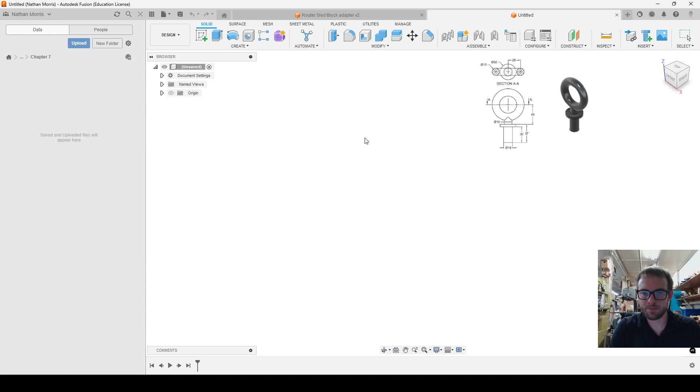To get started, we'll create a sketch on this bottom plane. Looking at the drawing again, we have this cross section. We have a circle that's 15 millimeters in diameter, and it is 25 millimeters from the center origin.

I'm going to create a line and make it a construction line, and that is going to be 25 millimeters long. Then a circle, I don't want it to be construction, and that needs to be 15 millimeters in diameter. The book recommends that we also make a construction line.

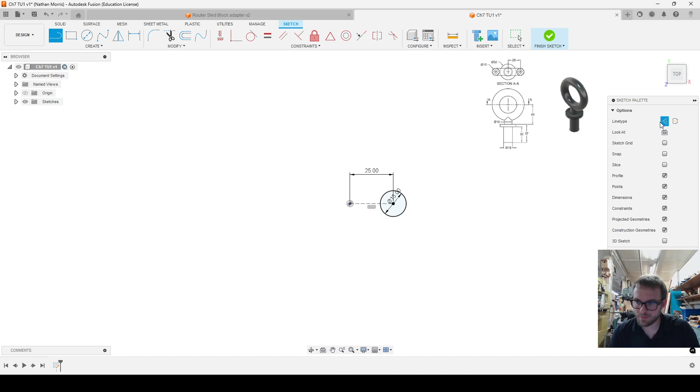This way too, just as a center line for this next step. So I'll hit finish sketch, and it brings me like this. I actually don't think I needed that center line, but I'll do it the way the book said.

So I hit the revolve tool up here, and it brought me into here. It already had the profile selected because that's the only shape that was valid that I've drawn so far. And so I could have selected the green axis here, but I'll select my

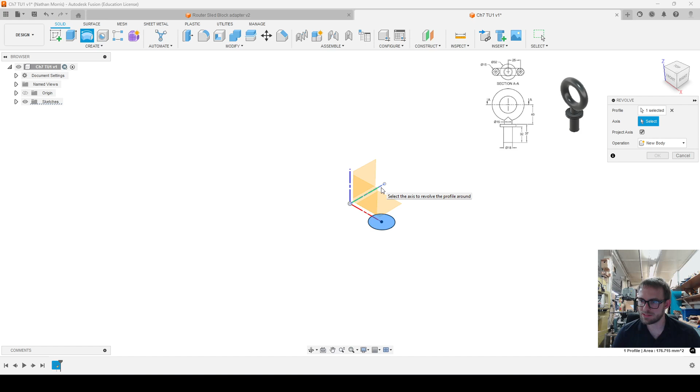construction line here, and then it automatically does this ring all the way around. So it's a partial revolution, but it does 360 degrees by default, so that works. I could also change it to full, same thing. So I'll hit OK, and now I need to create the next part.

So to do that, I need to create a construction plane, but I don't have something to construct off of. Oh, actually, when I do select that, I can see this.

But if I couldn't, I could always go over to the construction or the origin area here, and I could turn on these planes to make them visible. And so if it didn't show by default, I could select that.

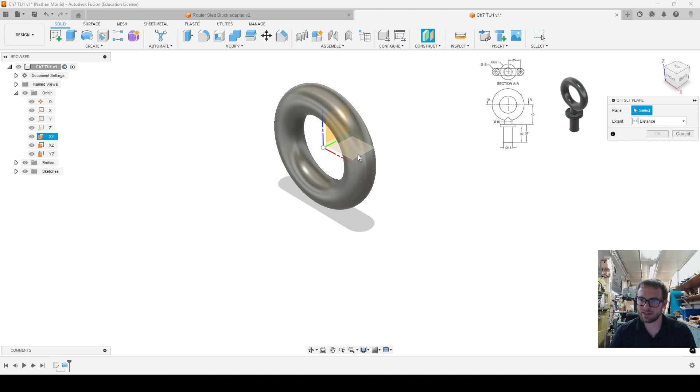So I'll select from this middle plane, which is my bottom plane, but it's in the middle of my ring. I'll select that, and I want to go down 40 millimeters, and that's specified.

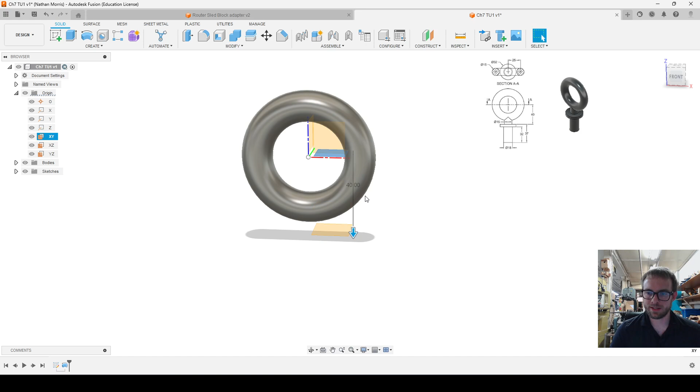That is the top of that circular flange thing. So I'll do -40, and I'll hit enter. Now I can turn off those construction, the origin planes rather.

So I'll create a sketch now, and I'm going to create it on this plane. We still have this origin to reference, so I can center things on that. Now I'm going to be creating that flange, or rather the little vertical part just above the flange.

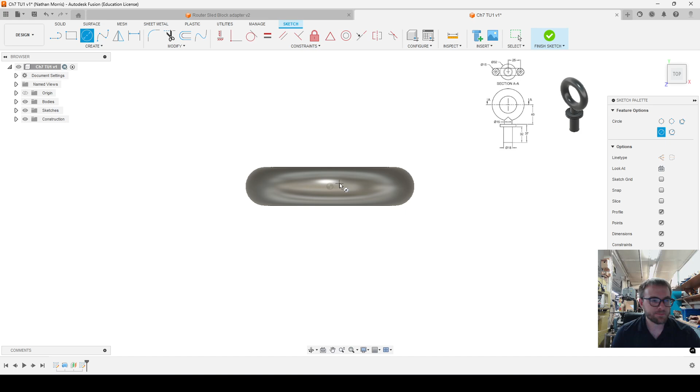So I'll create a circle, and that's hard to see from this view. 32 millimeters is the larger one. Oh, it says in the lower image that it's 15 millimeters in diameter. So same as the ring, it's 15 millimeters in diameter.

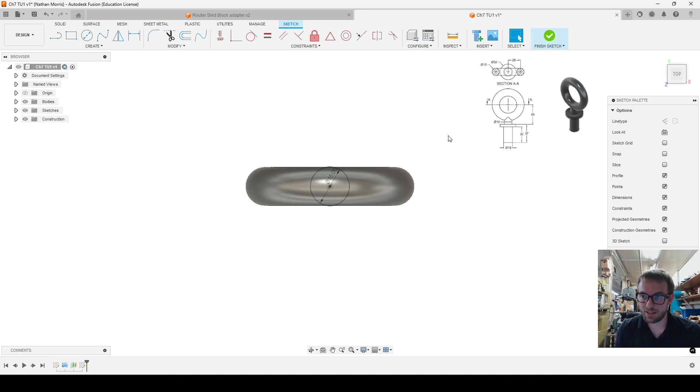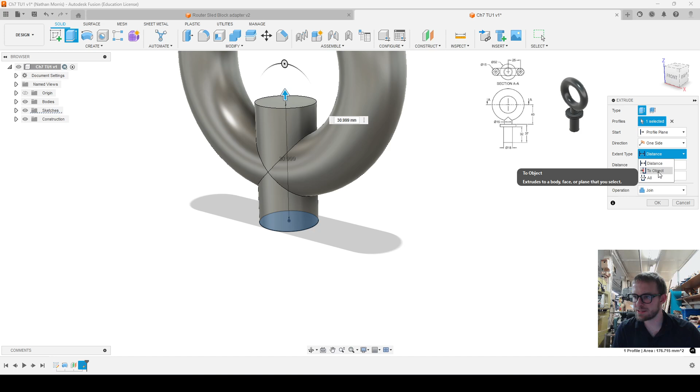I can hit enter, I can hit finish sketch, and then I can extrude this upward, and I can just drag it up into here. Now notice if I drag it up, it defaults the operation to cutting over here in this menu. I don't want it to do that, but I also want it to go a very specific amount. So what I'm going to do is change it to join, and rather than extent type distance, I'm going to say to object, and that object is going to be this ring.

So now it won't intersect with that, it'll just go all the way up until it hits in all of those areas. So that's what we want.

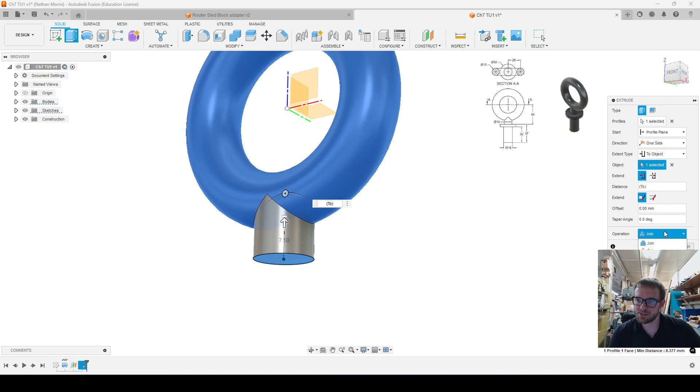So again, I changed my extent type to object. The object I selected was the ring, and then it is joining with that ring so that it's going to be one solid body. I'll hit OK, and now this is considered one body. It's all together.

So I'll go from there. Now I can create a sketch on the bottom of this plane and draw my washer flange thing, whatever you want to call it. This is 32 millimeters in diameter.

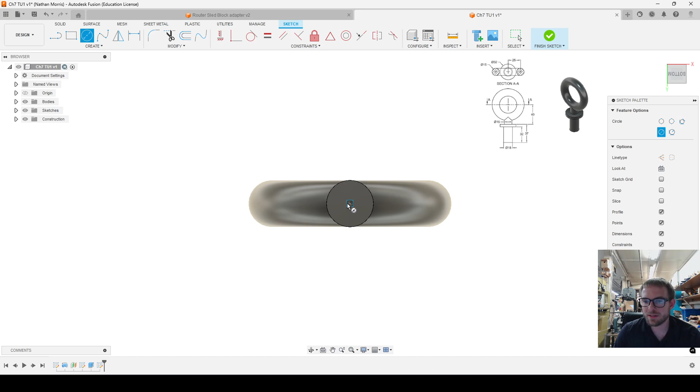So I can hit E to extrude that. We're going down, and it is 37 minus 32, so it is 5.

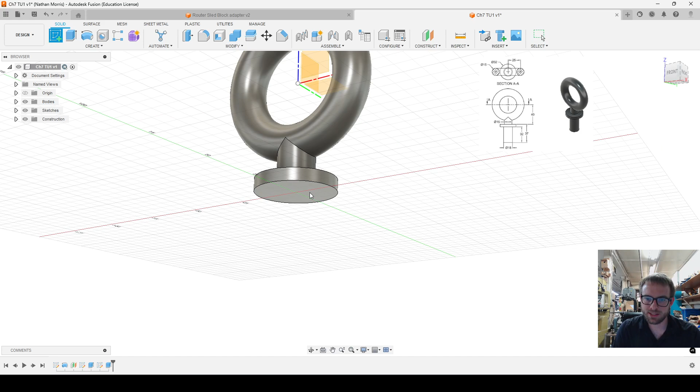And I can just keep going down too. I can create another sketch right here, create another drawing, and since I'm not given another diameter, or rather I am actually, at the bottom it says 18. So I can draw an 18 millimeter circle there, and then hit E to extrude, bring that down, and that is 32 millimeters.

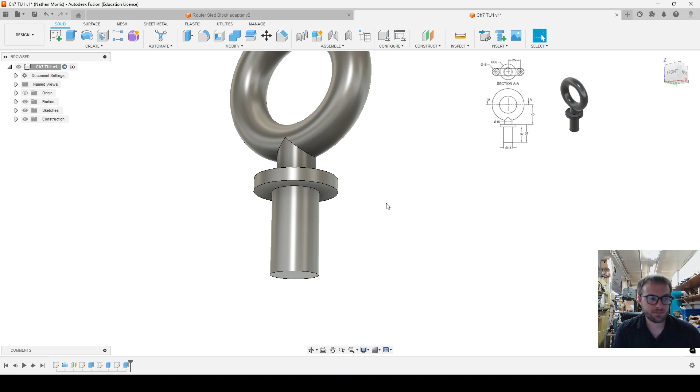So that should be my entire shape done.

So now the rest of the instructions were that I need to assign the stainless steel AISI 310 material and calculate its mass properties. So I'll do that.

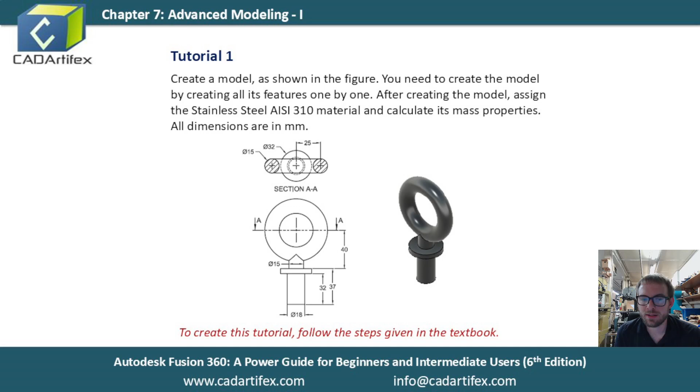You can apply physical properties to certain bodies or to the overall project. So if I right click up here and click physical material—oh sorry, closed my view wrong. So I can right click up here on the overall project, or I could do the body, but I'll do the overall project. Right click on it, click physical material.

It brings up this menu over here, and I have steel, or metal, as a subfolder. So I'll scroll down, and I'm looking for steel, stainless steel AISI 310. AISI 310. So I'll click and drag that.

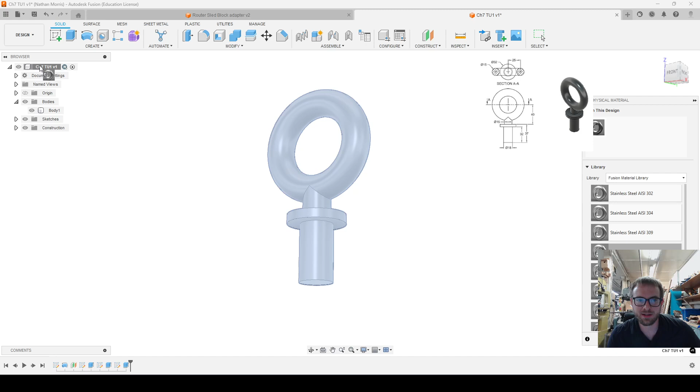I could drag it onto the shape here, or I could drag it to the overall thing here, or the body here. Three different ways to do it. I'll click and drag it onto there, and now it has applied it. If you look in this design, it always defaults to steel, but now this is what is actually applied to this. So I'll close that.

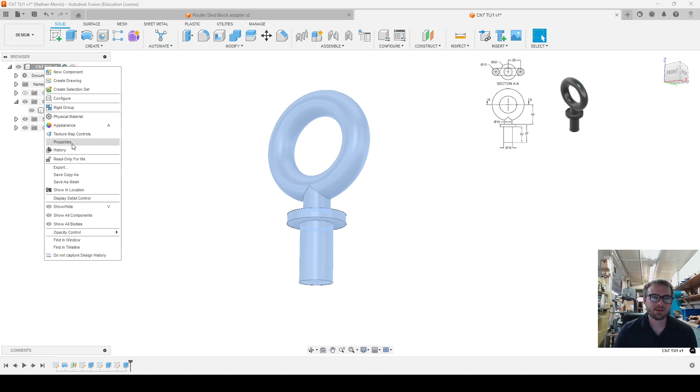Now I need to right click here, and I am going to properties. There we go, I wasn't seeing it before. So right click on the overall file, click properties, and now it is loading the properties of this item. So I have the part number, blah blah blah. The physical mass is—because that's what I'm looking for, right?

Calculating its mass properties, so the mass is given right here. So if I was to make this thing out of this type of stainless steel, it would weigh 331.887 grams. So that's a really cool thing.

It calculates the volume, it knows the density of the materials, and can figure out all this information about it. So Fusion 360 is really powerful for modeling and simulating different parts under stress or things like that, or calculating its properties, knowing exactly what material it's made from, how much it weighs. It's pretty cool that you can calculate that before you ever go to create it in real life.

So if I was to make this in real life and I just nailed the tolerances and it was exactly to spec stainless steel, to that spec, it would weigh exactly that much. So pretty cool.

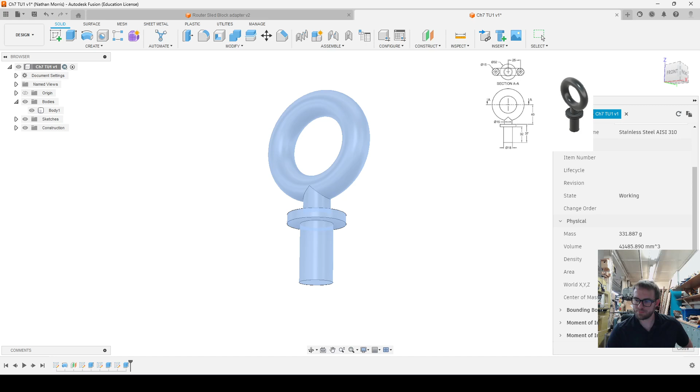Not really something that I've had to do much of. I haven't really cared about the weight of my stuff, but if I did, then it's cool that I can find it out just by going to the properties of the item.

Now let's make sure and save this, and then we're done.